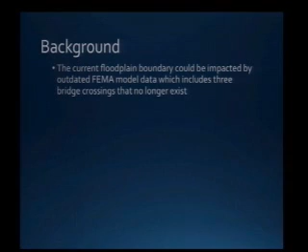So the current mapped floodplain boundary in that area does appear to be impacted by some outdated model data and 3 bridge crossings that no longer exist, and it does not include the current US 95 bridge that goes through the South Couplet either. In addition, we've had some other changes in the floodplain in that area.

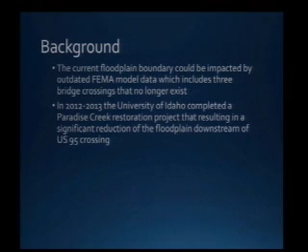In 2012 and 13, the University of Idaho completed the Paradise Creek restoration project that created the open channel north of the U of I Rec Center. And that project, at the end of the construction of that restoration project, they did a remapping of the floodplain, and it substantially reduced the floodplain size downstream of this current location at the US 95 crossing.

There are 29 parcels in addition to the 3 that kind of started the discussion that are impacted or located within that current floodplain boundary. 14 of those parcels are located within Legacy Crossing District, which was started off the agency's interest to explore this concept.

There are also a number of parcels, now 15, that are outside the district as well, just within the city limits.

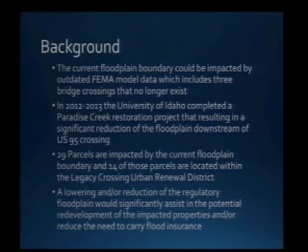The lowering or reduction of floodplain, if that ultimately were to occur, could significantly assist in the redevelopment of properties in that area and/or reduce the need to carry flood insurance for homes that may be inappropriately mapped in the floodplain area. Annual flood insurance is based upon your relative elevation to the floodplain elevation, but it can range anywhere from maybe $500 to $600 a year to several thousands of dollars per year, depending upon the property and the situation.

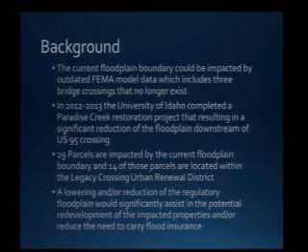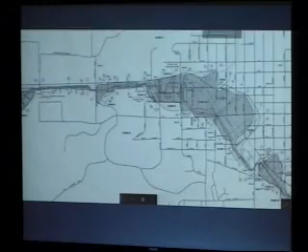There are a few areas where you see these lighter shaded areas—this is Ghormley Park. Those are the 500-year floodplain events, but that's outside the regulatory floodplain from the perspective of elevation of structures. You can see there's a fairly large reduction in the floodplain boundaries between those two maps with the remapping effort. So what we're looking at is this area here just off to the right of the screen.

So this was the condition back, I think, about 1975—this map is from then. You can see that Main 95 went straight through. This is Sweet Avenue here to the left of the screen. But there are 3 bridges that don't exist today.

So this is the infamous concrete plant bridge. There was a concrete plant that was located here just south of the creek. And then there are 2 separate railroad bridges, and then you reach the old 95 bridge at that time, or the current bridge at that time.

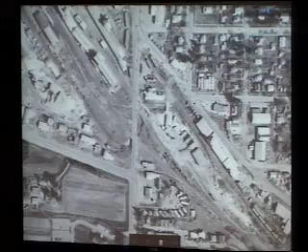So this is what that area looks like today. Those prior 2 railroad bridges were located here just to the west of 95, and the concrete plant bridge was located just to the west-hand side of the current bridge crossing of Paradise Creek on US 95 Main. So there's been a fair number of changes that occurred. The old bridge still does exist and is still there present today.

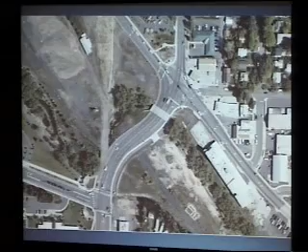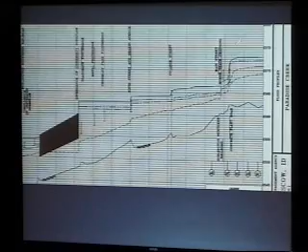Just a little closer view: from the 500-year flood elevation, it dropped about 6.5 feet upstream of the concrete plant bridge to the downstream side of the Main Street Bridge. So these are showing the old Main Street Bridge, the 2 railroad crossings, and then this concrete plant bridge.

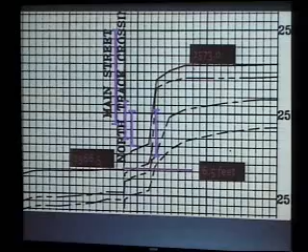So that's what's currently in the flood insurance study. But you can see a fairly dramatic drop in flood elevations at that time, and this bridge was really contributing a great deal to that profile.

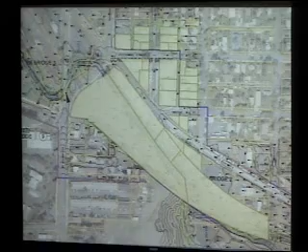So these are the 29 parcels that are impacted. Again, we had 14—this purple line reflects the Legacy Crossing District boundary. So it kind of goes back here around down to the Styner-White intersection and then comes back up the Troy Highway. So there are 14 parcels located within the boundary, and I think 15 that were outside the Legacy Crossing boundary that were impacted by the floodplain.

So when we identified this, it was brought to the Moscow Urban Renewal Agency Board to consider funding a study to assess whether the current mapped floodplain was correct and accurate based upon the mapping data that it appeared to be based upon. And it was broken out into 3 different phases.

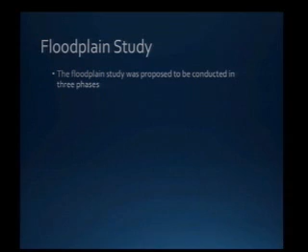Phase 1 was just taking the old model, and FEMA's model was about 2 generations behind what currently exists, bringing it up and importing it into the new modeling software platform, removing the bridges that no longer exist, and then adding the 95 bridge back in based on construction documents for the new bridge. We did an in-office assessment to see whether we'd expect significant reductions if we were to pursue a letter of map revision, which is the process by which you submit data to FEMA requesting they modify the designated floodplain map.

Phase 2, if Phase 1 indicated substantial reductions in flood elevations, would move on to the actual field survey. Before you could do any remapping, you'd have to go out and resurvey all the cross sections. So far up the floodplain there are surveyed cross sections that establish the topographic profile and cross section for the creek. You'd need a full field survey of those cross sections and then a more detailed modeling analysis. Phase 3 would be any assistance they'd provide in processing the letter of map revision or responding to FEMA as they reviewed that request.

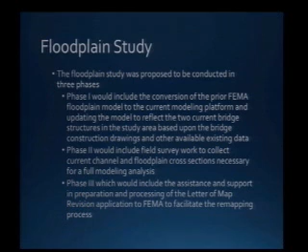So we reached out to Alta Science and Engineering, which was previously Terragraphics here in town. They've done a number of flood studies for us in the past, and began that discussion and process. The Phase 1 work has been completed, so the agency engaged Alta to do the Phase 1 analysis to determine whether it was worth pursuing into Phase 2.

The initial results did indicate some fairly large flood elevation reductions, but it may be somewhat limited in extent. Looking at the model, Alta felt much of the model data was somewhat inaccurate - they were having difficulty correlating stationing in the model to actual physical places on the ground. They cautioned that because of the age of the model and its somewhat questionable foundation, they didn't want to provide definitive outcomes. But they were confident there would be some reductions, though the extent would need to be determined - they really needed to move on to Phase 2 to understand that.

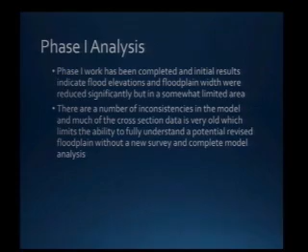So those inconsistencies in the cross-section data and the age of that model really made it difficult for them to fully predict what the floodplain could look like with the remodeling effort. There's a copy of the memo that was included in your packet for today.

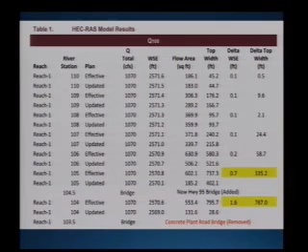Yes? How old is very old? What are we talking about? Well, the initial models formed in the late 60s, back at the time they were first mapping floodplains across the country with the creation of the National Flood Insurance Program. The first map, I think, was in 1970.

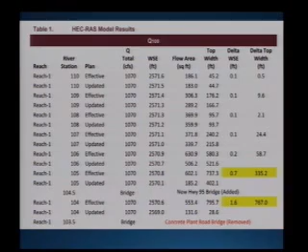So to explain this table, this was their initial output of the modeling. Each of these numbers - 105, 104, 105 - is a station number as you move upstream up the creek. And you have the flow - this is the 100-year flow event, 1,070 cubic feet per second - and the water surface elevation, the flow area, and the top width of the floodplain. For each station there are two runs noted: the effective model, the effective map, and then the updated model when they took those bridge structures out and put the 95 bridge in.

So at station 104, it had a floodplain width of about 795 feet and an elevation of 2570.6. By removing those structures and putting the 95 in, the floodplain width went from 795 feet to 28.6 feet - a reduction of 767 feet in the actual floodplain width. The predicted flood elevation went from 70.6 to 69, so there's a 1.6 foot drop in predicted flood elevations.

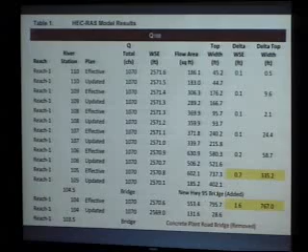Moving up to the next station, the floodplain width previously was 737 feet, and the updated run indicated it would be 402 feet in width - a reduction of 335 feet in the width of the floodplain and 0.7 feet in the flooding elevations. What they had difficulty with was actually establishing these cross sections in a physical location along the creek, which made it hard to show a map demonstrating what these flood elevation changes would mean to the horizontal extent of the floodplain. But just for reference, at this station the floodplain width was 795 feet and was potentially going to 28.6.

This purple line represents 795 feet in width, the first point upstream of the concrete plant bridge where the floodplain reached 795 feet in width. And this green line is approximately what that 28.6 feet in width would look like.

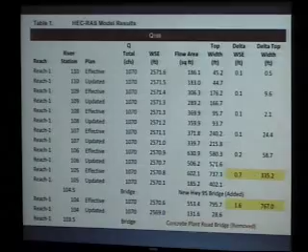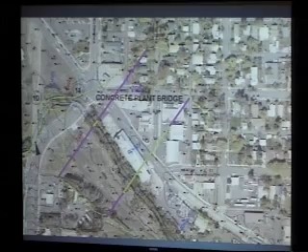Moving upstream to the next section, this is the next distance on the table, where it would be 737 feet in width, going down to 402, which is about what this green line represents. This is just to give a relative order of magnitude, not necessarily where the boundary would fall, but the scale of reductions predicted based on the Phase 1 analysis.

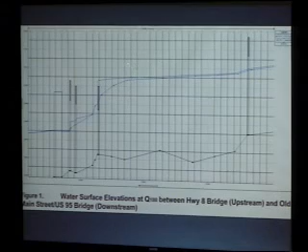And then these are the resulting profiles. This is the current effective 100-year flood elevation, the top one is the current flood elevation, and the bottom one is what their modeling effort appeared to indicate it would look like.

In an area approximately 210 feet upstream of the prior concrete bridge, we saw anywhere between a 2.5-foot reduction to about 4 inches by the time you got 200 feet up. A lot of that's going to be dependent upon the topography as it exists today.

There have been a lot of activities that have happened since that time period near the channel that could impact that, so to really understand it, they felt they needed to do the full survey.

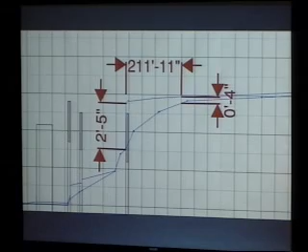And these are just the 500-year elevations, going from about 3 feet at the bridge to about 5 inches by the time you got to the Styner-White intersection up on Highway 8.

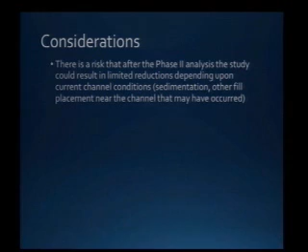As discussed with the agency board, the Phase 1 results did indicate there'd likely be some benefit from remapping of that area, but it would be difficult to determine until you actually did the field survey work of Phase 2 to understand the full scope of what benefits could be received.

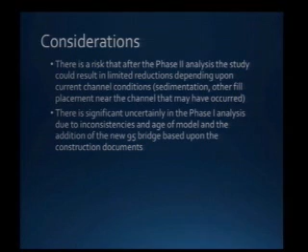There is significant uncertainty in the Phase 1 analysis due both to inconsistencies in the model as well as by adding the new 95 bridge just based on construction documents.

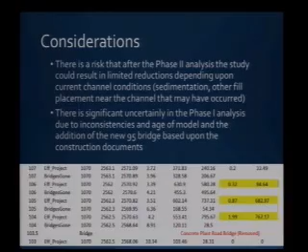They did an initial run without adding the 95 bridge, eliminating the 3 bridges that no longer exist. As you moved upstream, we were going from 737 to about 400, and in this analysis it went to 54 feet in width.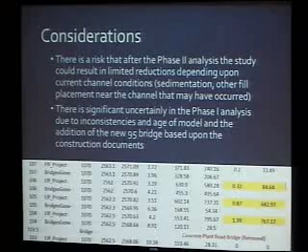And even as you went up to the next station, we saw 85 feet of reduction even further up the stream. So based upon the actual conditions that really need to be entered by survey, you can see some variation that may result there.

From the agency's perspective, in trying to promote redevelopment of properties within the district, the agency did feel that was something necessary and appropriate for it to support and pursue.

We have had experiences where buildings in town had to be elevated because of flood risks. A good example is the University Point building on 6th Street. The reason it sits so far up off the street is that it was previously in the floodplain.

That's where Domino's is now located on 6th Street, just west of the agency property. That building actually got a variance to only elevate it 1.6 feet above the floodplain elevation rather than the full 2 feet because they were having ADA access and ramp issues getting it to fit on that site.

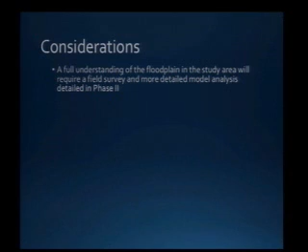But those are both costly for the development, and sometimes long-term can harm the viability of a project and how well it does if it has to be elevated substantially like that, away from pedestrians and pedestrian access.

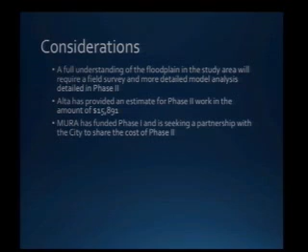The agency did solicit a proposal from Alta for Phase 2 of the work, and that cost estimate came in at $15,891. At our last meeting of the agency, the board did authorize moving forward with Phase 2, but requested staff to bring a request to the city.

The request is to consider partnership with the agency in funding this study, roughly splitting the cost in half between the city and the agency, so it would be $8,000 for each entity.

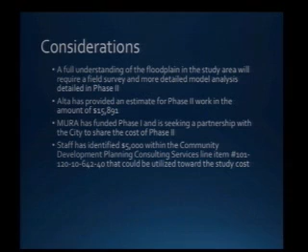Within the community development department, we do have $5,000 of planning consultant services that have not been identified for any other use that could be applied to this project.

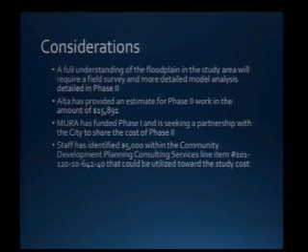And then I believe Gary provided a memo recommending that the remaining $3,000 could come from the council's legislative reserve fund, should the council desire to do so.

So that was the estimate. I think it was in your packet as well.

So the action from the committee today is either to recommend approval of contributing $5,000 from the community development department and $3,000 from the non-prioritized projects, or provide staff with further direction. I'd be happy to try to answer any other questions you may have.

Can we go back to the slide of Phase 2, Phase 3? Yes. All 3 phases?

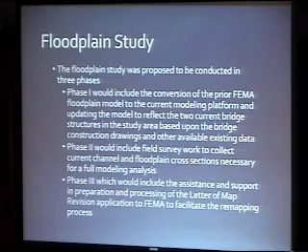I'll ask something while you're contemplating this slide. I hadn't thought about this earlier.

Is there any way to know if any of the adjusted floodplain further upstream that the university did could have been due to the bridge, or is it all due to the stream restoration? Their modeling effort ended before those bridge structures. I'm just curious if that far upstream, any of the remapping could have been a result of the bridges that are now no longer there in this area, or is it all attributable to downstream improvements?

Previously Paradise Creek went underground at Line and Paradise Street, and that was a substantial flow restriction. So when they added the second channel, they now have both the previous underground channel that's still available and that new one. So it was largely a downstream capacity increase that caused that change.

I don't know if you remember, but back in the big waters of 95 and 96, the big melt-off, did any of that lap over Highway 8? I've looked at some old pictures, and I cannot find any locations where it crossed the Troy Highway in that location, because that was a pretty substantial amount of water moving through there, and I would have thought that if the floodplain was still as indicated, it would have been swamped.

Also, as this progresses through, what kind of timeline are we looking at for final FEMA modification of the map? I'm expecting Phase 2 would probably take about 4 weeks to get through, depending on weather conditions. We have to do it during low flow conditions because Alta has to go in and survey the channel itself, so we'd want to do it before the spring runoff. I'd expect Phase 2 can be completed in about 4 weeks, and we'd see the results.

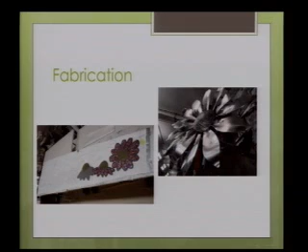So I wanted to start showing you a little bit of fabrication. She's met with us, with staff, to look at her design principles and materials that she'll be using, and so we had a meet and greet to get started. There is another contractor that she's utilizing for the sculpture piece with the bee and the flower, and so there's some of those photographs here as well. But she makes a template and then works off of that template to design the mosaic features that are going to go on the walls. So these are recent photographs that she's sent me.

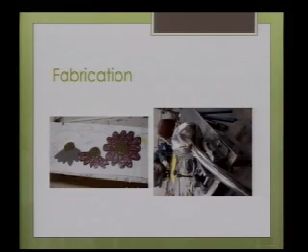And you can kind of see how she's beginning the mosaic pieces on the left, and then the fabrication in the metal shop of the flower, which is pretty cool. Those are real close-ups.

So the first one is March 10th, and then on the 23rd and the 24th, we'll have 2 days worth of workshops at the 1912 Center classroom.